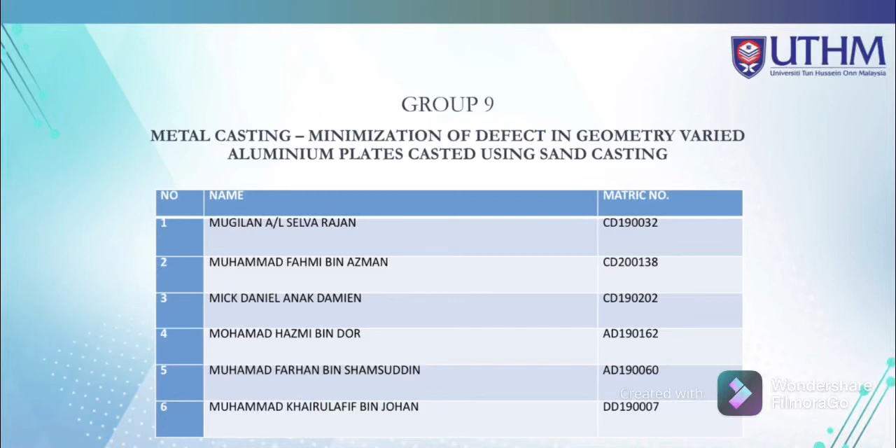Casting is a steel item produced by allowing molten steel to solidify in a mold. The shape of the item is designed by the shape of the mold cavity.

Casting is a method that involves an interaction among many parameters, including the melting temperature of the charge, the mold condition, temperature, moisture content, sand and kind of binders used, pouring temperature and gating design. The variation in these method parameters can affect the rate and the crystal formation.

In other words, the distinction in microstructure of the casting can result from non-uniform cooling of the molten steel within the mold. In casting, especially sand casting, it is hard to maintain this regulation due to the difficulty of controlling its method parameters. Therefore, it is hard to produce a casting with a uniform microstructure.

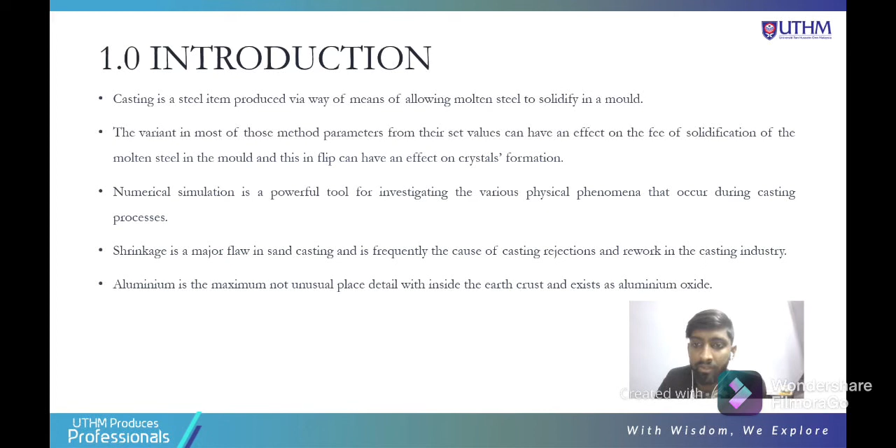of optimizing casting parameters. Shrinkage is the major flaw in sand casting and is frequently the cause of casting rejections and rework in the casting industry. Shrinkage is the reduction of casting size during the transition from liquid to solid state.

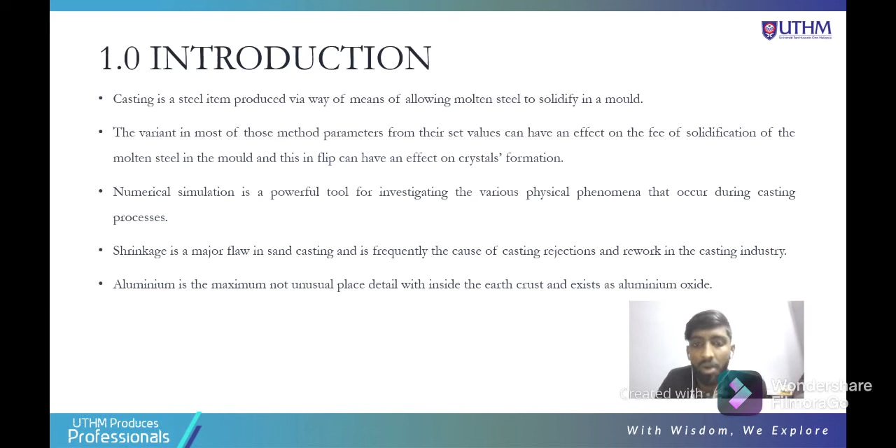However, the likelihood of its negative effect on the casting can be reduced. As a result, it is important to identify common casting defects and take appropriate steps to minimize them, making simulation one of the most effective modeling tools in the casting industry.

Aluminium is the most common element in the earth's crust and exists as aluminum oxide. It possesses some unusual properties including high resistance to corrosion, ease of fabrication, high thermal and electrical conductivity, low weight and bright color.

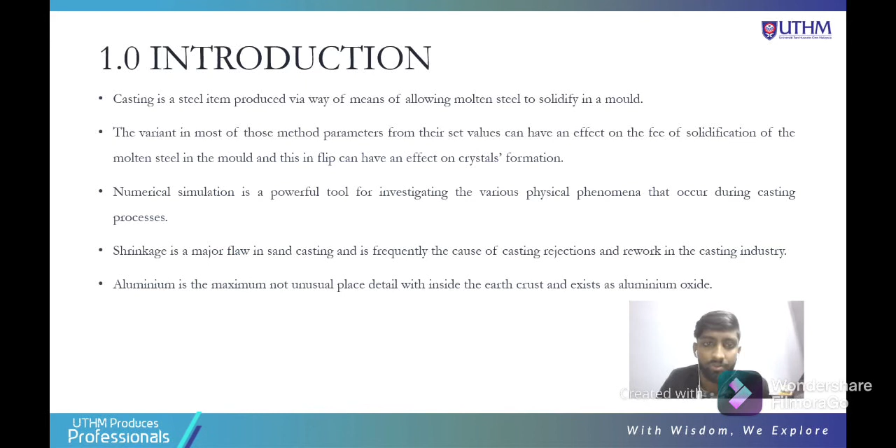The first thing I would like to talk about is the simulation program. In order to evaluate the defects, we need to use simulation software to improve the casting quality and minimize the shrinkage defects. The optimum way is to produce components through the casting process with the least defects, and the only way to achieve zero defect possibility is through controlling parameters like the composition of an alloy, melting and pouring temperature, gating design, molding and solidification rate.

The software that can be used in this simulation program includes AutoCAST, ProCast, Click2Cast, ADSTEFAN and MAGMASOFT.

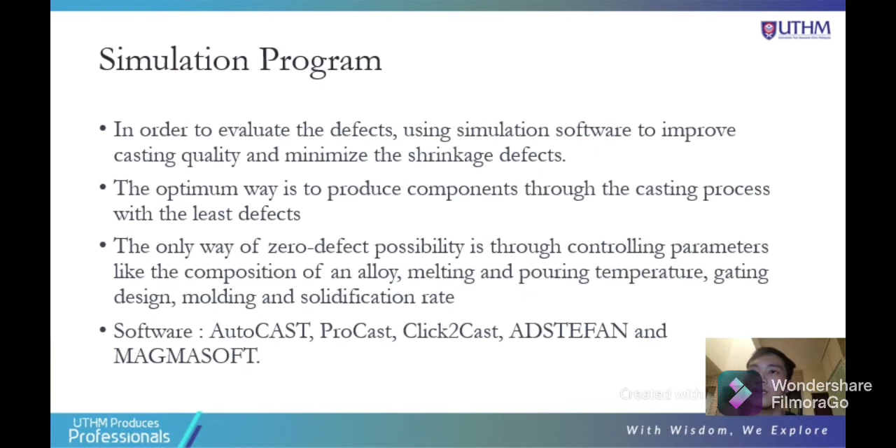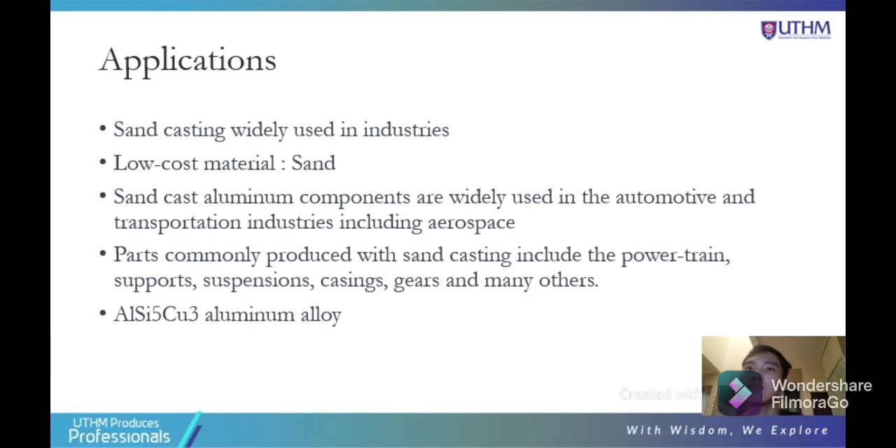Sand casting is widely used in industries and it's applied because of the low cost material used in the procedure, which is sand. Sand cast aluminum components are widely used in the automotive and transportation industries, including aerospace. Parts commonly produced with sand casting include powertrain, supports, suspension, casings, gears and many others.

Here are examples of products produced from sand casting, which is widely used in automotive industries. For example, in a car, there are suspensions, gears, engine crankcase, and the powertrain that you can see on the right side.

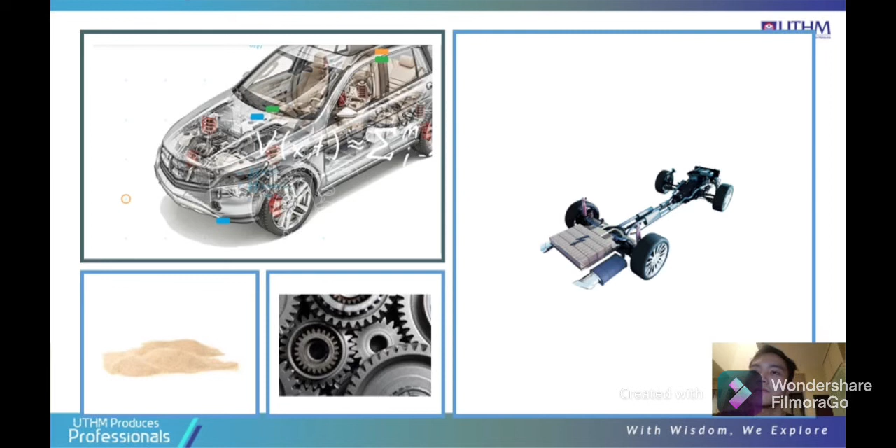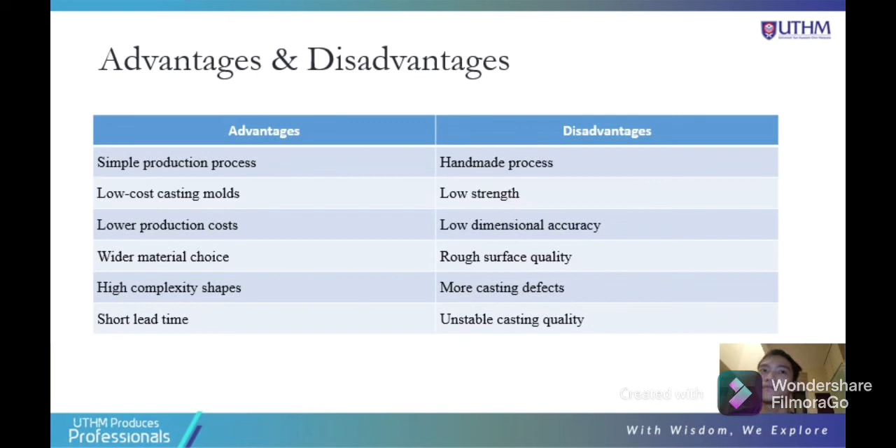In theoretical modeling, sand casting is distinguished by its own unique process and features compared to any other types of molding process. Sand casting can be used to make metal castings using non-reusable sand molds. Sand casting can even make complex exterior designs with fine details.

According to Christian Cavallo, a researcher, sand casting is one of the methods that has the ability to shape metal without having to perform a machining process, and casting can produce a near net shape product. This enables mass production to produce a quality, affordable, and durable product using sand casting.

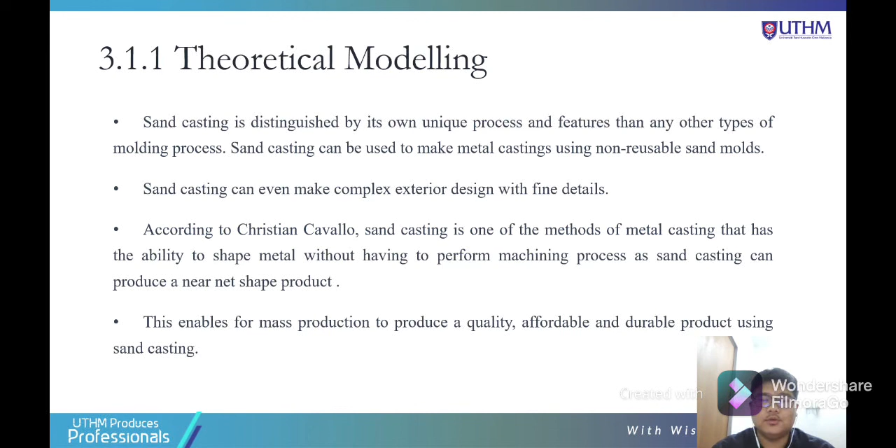For section 3.1.2, components in a sand casting mold are divided into four. The first one being the base sand, which basically creates the mold in its purest form, and it is necessary for the base sand to stay in the mold. The second is the binder agent, which acts as the agent for keeping the sand particles intact and in place for the further sand casting process.

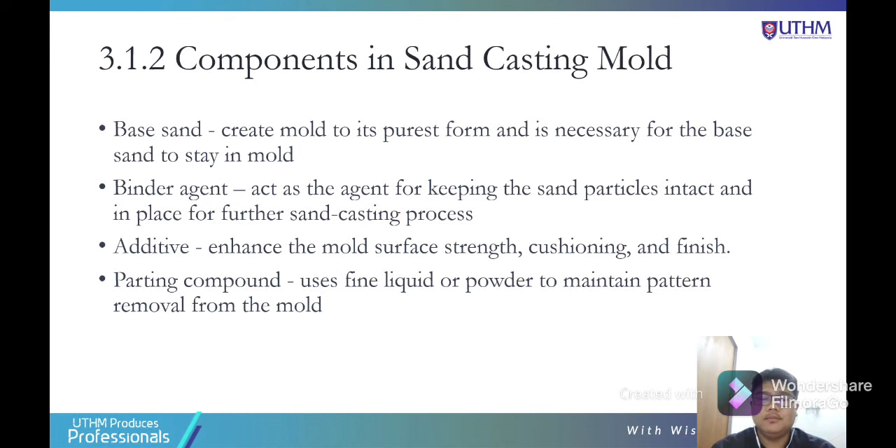The third is the additive, to enhance the mold surface strength, cushioning, and finish. And the last is the parting compound, which uses fine liquid or powder to maintain pattern removal from the mold.

There are many types of applications of sand casting, which is used to build engine blocks, medical equipment, automobile components, mining parts, hardware, gears and bearings, and so on.

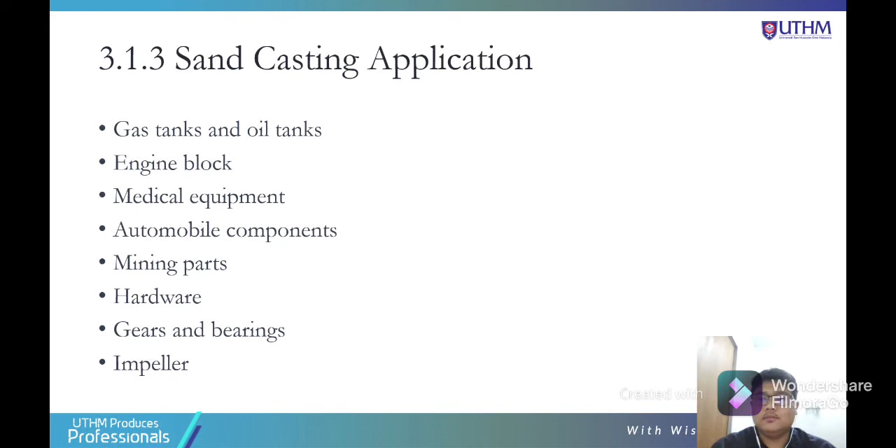For the gating and feeding system, it is a metal pouring device that directs molten metal into the mold cavity. There are four main reasons for a gating system in sand casting. The first is filling the mold cavity with enough metal.

This should happen in the least amount of time without raising the metal temperature. The second is flowing the molten metal smoothly to reduce turbulence and air trapping when casting.

Third, the gating system determines the optimum temperature range so that shrinkage occurs in the gating system rather than in the casting pieces during the metal cooling process. The last is combined with a technique for removing metal contaminants.

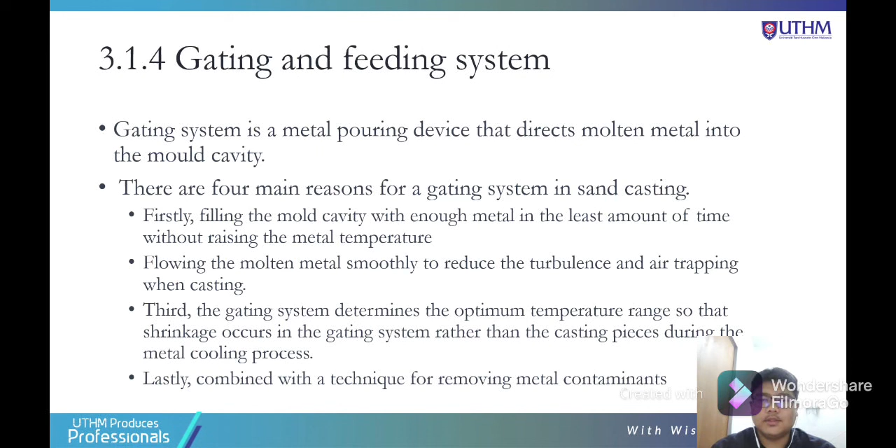Much of the expense of aluminum permanent mold casting is the machining and shaping of the mold, which is normally made from grey iron or steel, with the requirement and component geometry separated into two halves. The mold is formed into the geometric shape of the part.

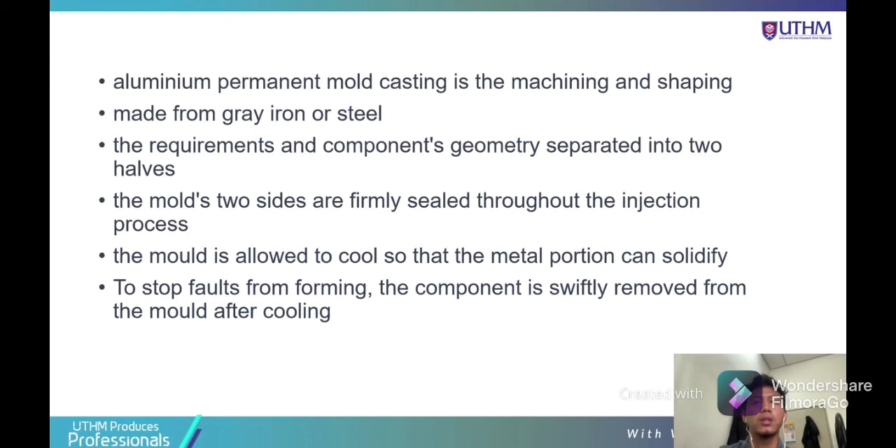The mold's two sides are firmly sealed through the injection process to prevent the presence of air or other impurities. Prior to pouring or injecting the molten metal into the mold, it is heated. After the procedure is complete, the mold is allowed to cool so that the metal portion can solidify. To stop faults from forming, the component is swiftly removed from the mold after cooling.

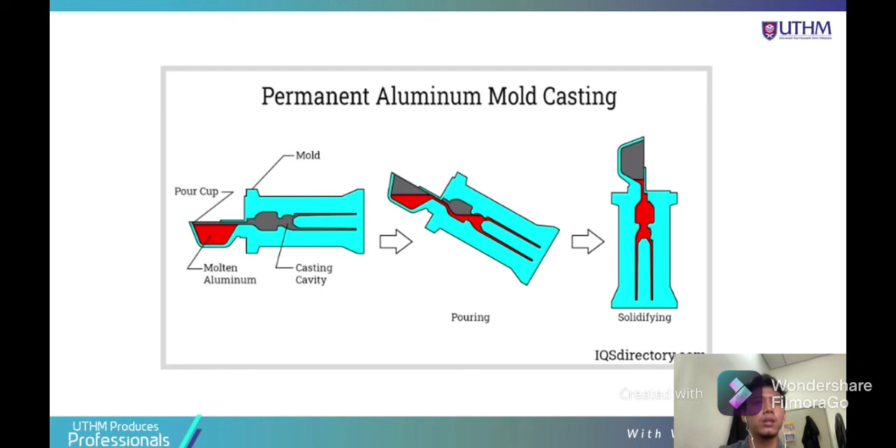Okay, we can see the method of permanent aluminium mold casting, that is pouring and solidifying. Okay, we continue to design numerical experimental analysis.

It is because of its high mechanical properties such as hardness and tensile strength. Because of its good mechanical properties and favorable casting, this alloy is used to manufacture automotive components such as engine crankcase blocks, petrol and oil tanks, tool handles, and so on.

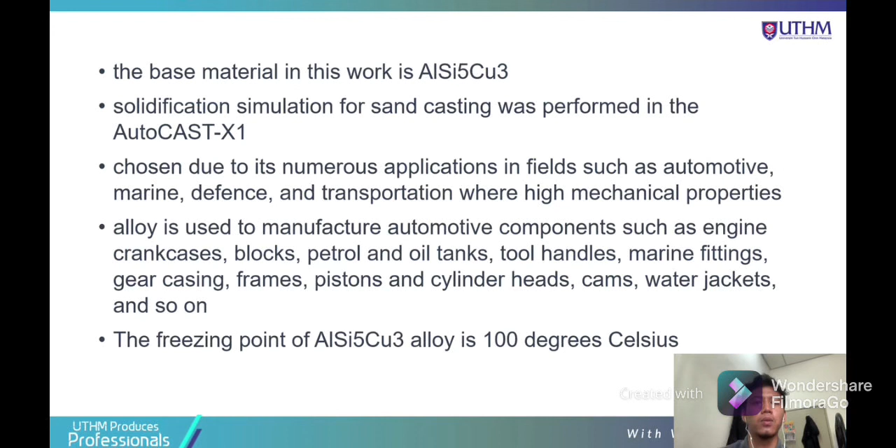The freezing point of AlSi5Cu3 alloy is 100 degrees Celsius. Thank you.

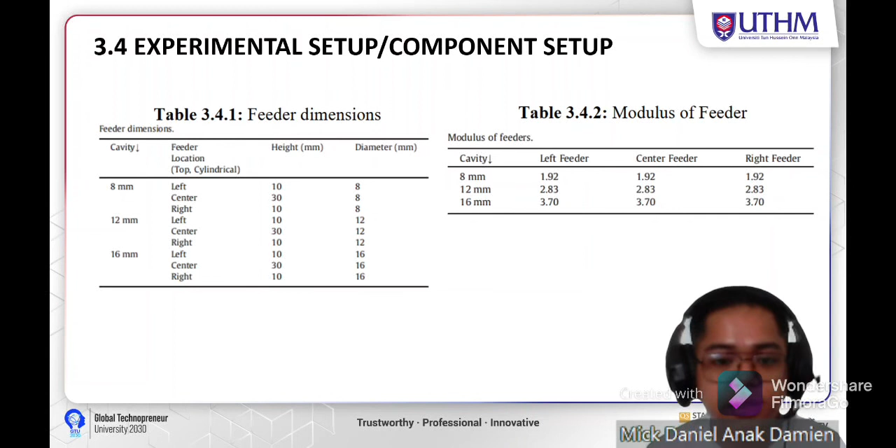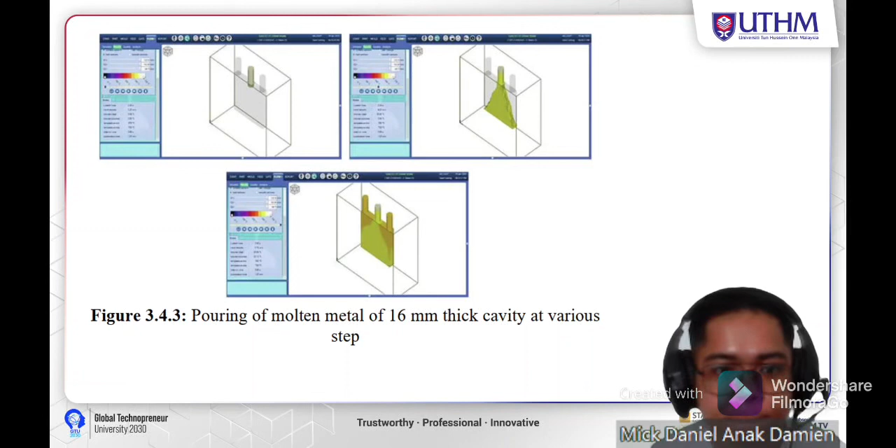This is the result that we obtain based on the software that we use. I will continue the presentation to my friend. That's all from me. Thank you.

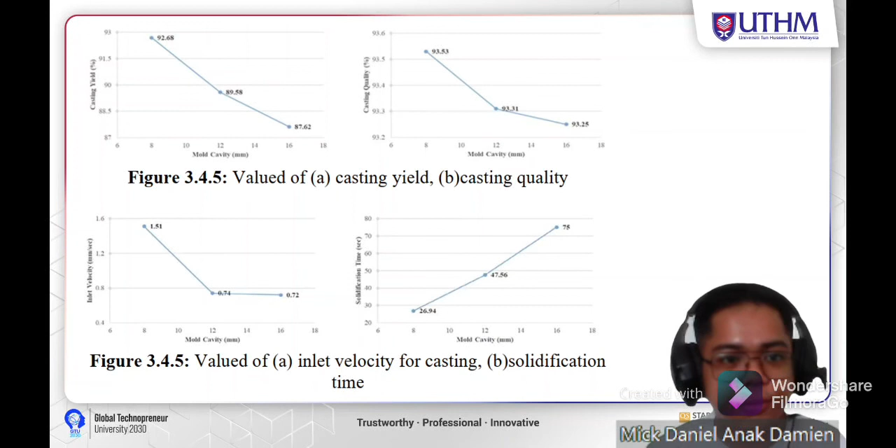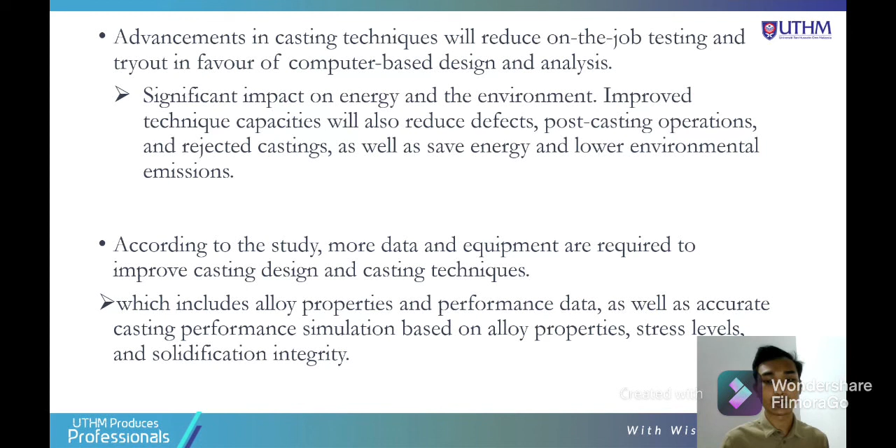They will aid in the production of better products at a lower cost and with less energy. Reduce on the job testing and try out in favor of computer-based design and analysis. That's all from me. Thank you.